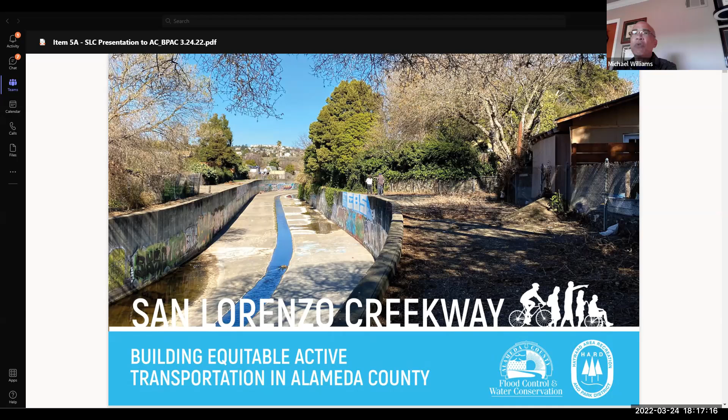Okay, you can move to the next slide, please.

So this is an overview of the San Lorenzo Creekway. There's a point in the past where it was called the San Lorenzo Creek Trail. We changed the name to Creekway because people, especially Caltrans and ATP funders, thought it was just a recreational trail, and so we weren't given serious consideration for the ATP program in our first application. So this will be the 3rd time we're applying, and we think the 3rd time will be the charm.

As an overview, if you're not familiar with it already, the San Lorenzo Creekway is basically taking the channelized portion of San Lorenzo Creek, from downtown Hayward at Lincoln Landing, right at Foothill, where it becomes the 20-foot deep, 20-foot wide or wider channel that runs all the way out to the water's edge, out to the Bay Trail. Once it gets closer to the water, it stops being a channel and becomes an engineered V section, but more natural.

Let's just say there's 5 or 6 miles of concrete channel. What most people don't know is the flood control district has a service road that varies in width, but at a minimum it's 12 feet wide, up to 16 feet, maybe 20 in some cases, that runs alongside the channel, sometimes on both sides, sometimes just on one side, but it runs the length of the channel. It's so they can get in there, do emergency operations, remove tree limbs and debris, and do other work that needs to occur a few times a year in the channel as emergencies occur.

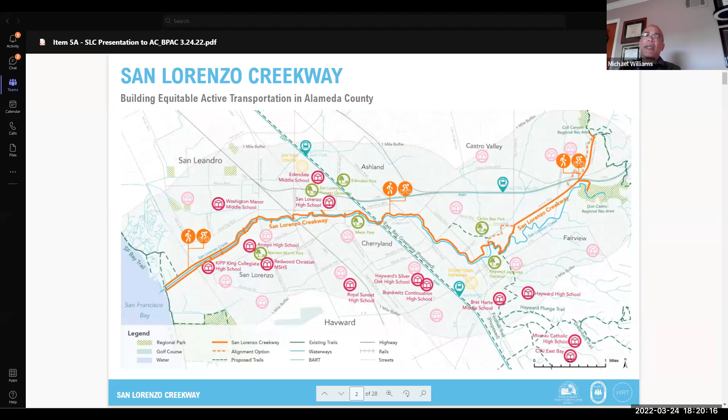So the plan is to open up that channel, to open up that road. It's somewhat paved already, but we'd repave it, put a finished paved surface on it, and open it up as a Class 1 pedestrian and bike facility for all users, all abilities, all programs, including safe routes to transit and safe routes to school. We would do that by putting at a minimum 2 things: a safety fence railing on the inside of the channel to prevent people from falling in accidentally, and privacy fencing, in addition to whatever exists, to protect the existing houses and homes along the creekway. So just fencing, railing, and opening it up as a ped and bike facility.

All in all, including from the Bay Trail into and beyond downtown Hayward, is about 7.5 miles. And we're doing it in one shot too - this is not build 1 mile or 1.5 miles this year, and then 2 years from now come back and do another section. The goal is to do all 7 miles as one project, one point in time.

So this layout here goes a little bit further to the east. There's actually a segment called the Upper San Lorenzo Creekway that starts at A Street, yes, right where Rick's cursor is.

That's actually a separate project that we are applying for under some other funding, not part of this main active transportation ATP program. But if we can get this active transportation funding and the Upper Creekway funding, eastern segment, we can literally connect the Bay Trail to the Ridge Trail through Don Castro Park and the East Bay Regional Park System.

We can connect East Bay Regional Parks. They have the Hayward Shoreline Park. We can connect them to their own parks in their own system, in addition to connecting parks that HARD has up and down the corridor. So that's basically the concept.

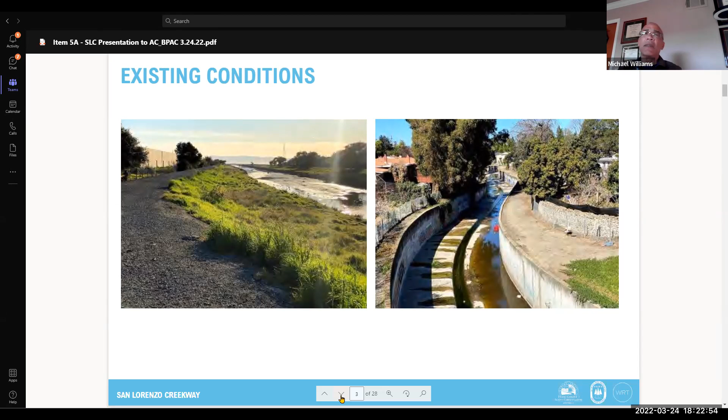On some level, I'd like to really add the BPAC to that list as well. If we get input, this is where the BPAC could serve - as individual members, or as one group - to certainly provide input at any point through this committee.

Okay, we can go on to the next slide. This is outreach that we did back in 2020 and continuing - we're doing some more now. The application is due in June. We're doing more outreach, but we're not going to redo all the outreach we did before, because we have that in a survey, encapsulated and documented in other data. But we're doing specific outreach, like to Reach - Ashland as a community center wasn't able to provide a lot of input and youth input, and Caltrans is looking for that.

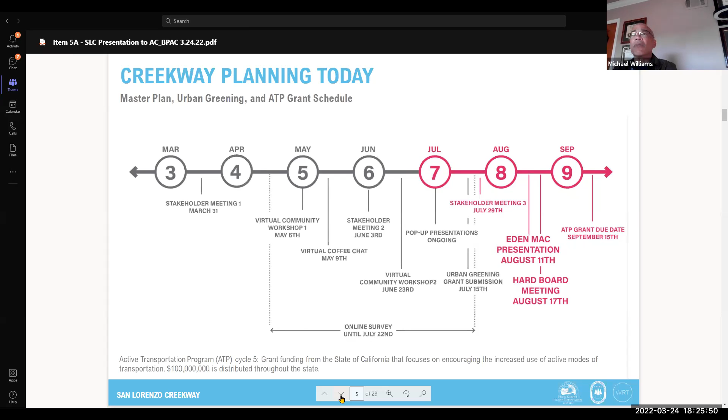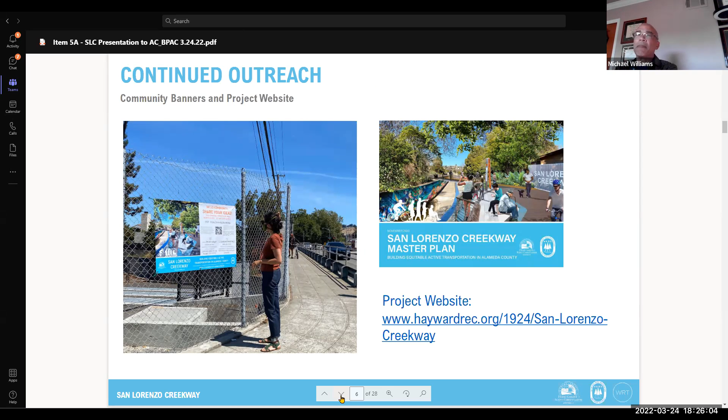The project website is on the HARD's website, and again, I can make that available. You probably don't want to copy it down now, but if you go to our website and put in San Lorenzo Creekway, look it up - it's there. We can go on to the next one, please.

All the questions really were about public safety, which we get and we're prepared to address. We're not backing down from public safety at all. And then there's 10% of people that don't want it no matter what—that's just 10% of people that feel that way about lots of things. There might be 10% of people that don't like pizza or something.

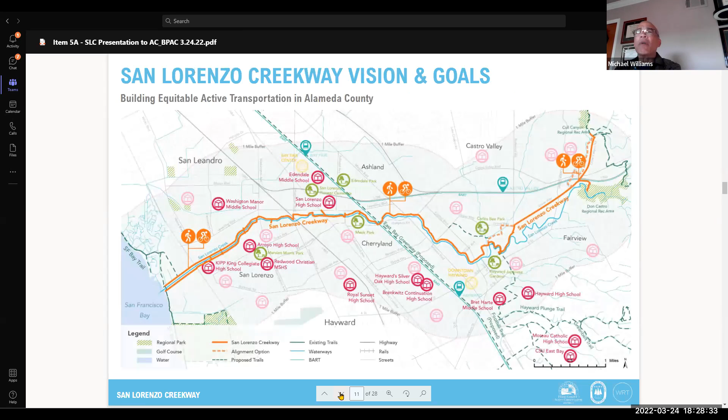Okay, thank you. That's more, we can skip to the next one. I hate to say stuff, but these are things we address.

There's tons of public benefit—to benefit communities in need. That's part of what Caltrans is. This money is set aside for communities of concern, disadvantaged communities that haven't had equitable access to parks, to transportation, to safe places to be outdoors. So that's what part of the active transportation monies, along with other grant funds, help do.

We want to increase walking and biking and make it safe. That's a very dangerous place. If people walk or bike on Lewelling or Mission—it's being fixed now, but there just aren't really good streets over there to walk or bike on safely, and most of you guys know that. So this helps address that by getting people off of dangerous streets where high injuries have occurred.

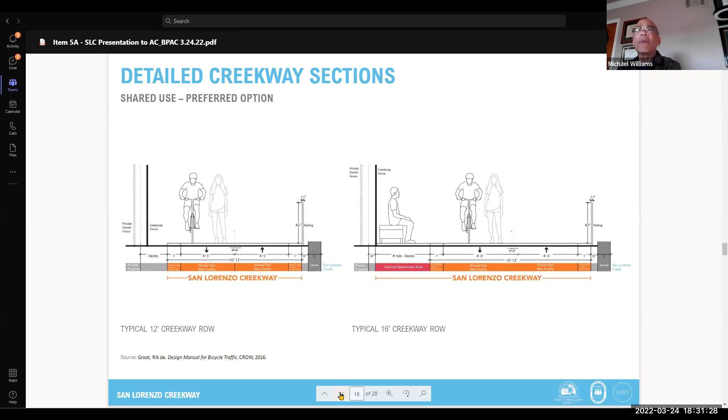This is a bad section to show because this is part of the creekway at A Street, but it was just an opportunity site, and this was one where we're planting opportunities.

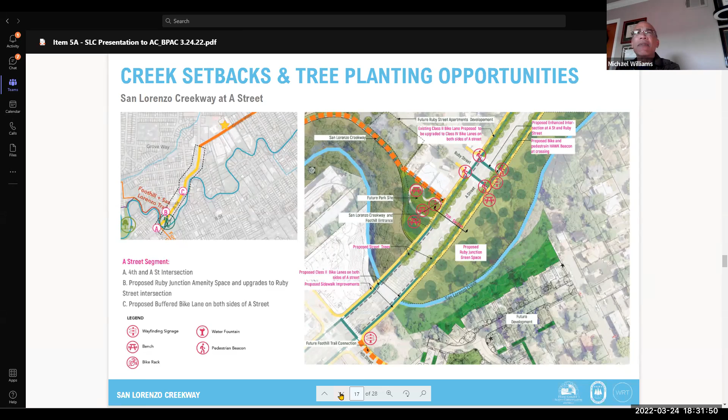Okay, we can go to the next one. Just connections, a list of things. Some of this is what we submit as part of our application, just saying what stores, libraries, and different things are nearby.

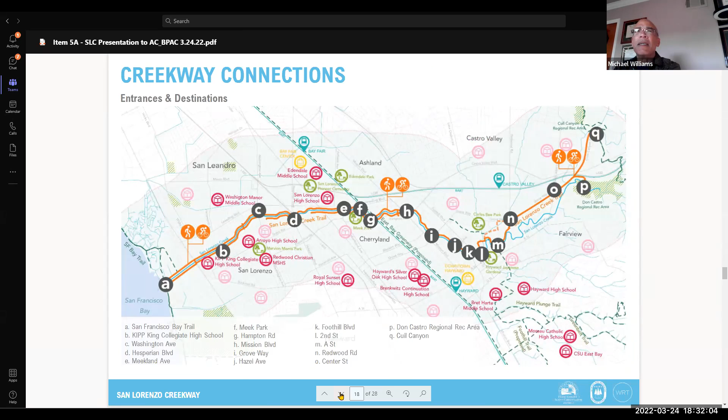Yeah, so this is where the BPAC can weigh in, looking at details where we have crossings and how we might do them. This is Washington Avenue proposed.

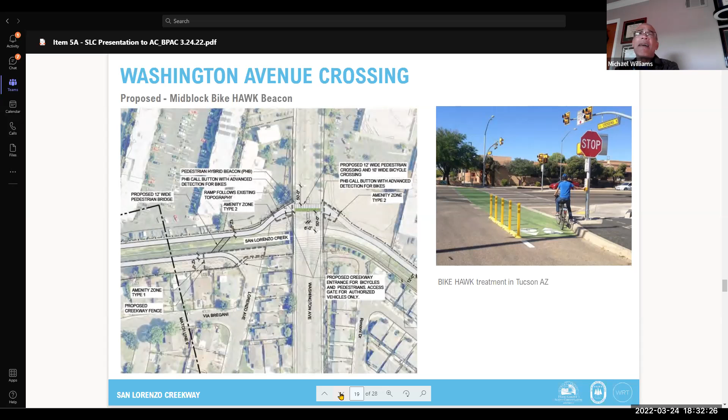You can go on to the next one because you guys all have this, so you can look at it in detail. If you have questions or other proposals or ideas, feel free to shoot me an email and we will look at those. We've studied this stuff pretty lengthily, in detail, but we're always open to having input, especially from the BPAC and people that are active users, riders, and participants in this area.

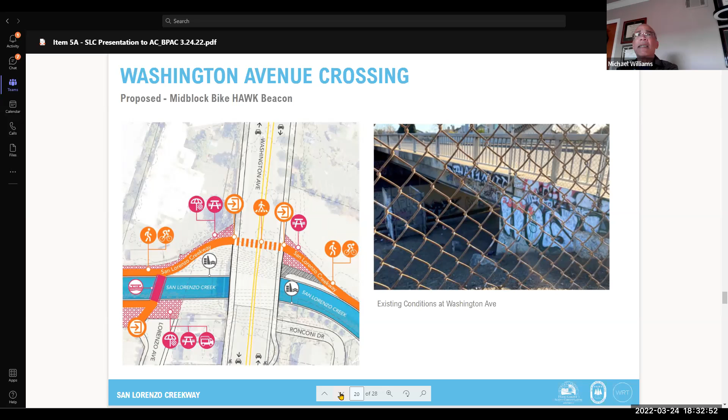Washington Avenue crossing. On to the next one.

Amenity zones. We'll keep going, please. It's just more of that, the same kind of view, telling you where we're looking to get railing, privacy fencing.

There's a couple of places we're going to have to put new bridges across to get from one side to the other, because the road is not continuous. So there's a few places where that occurs.

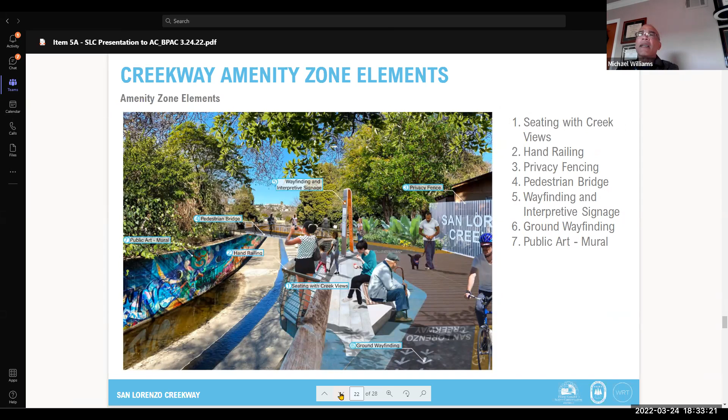And you can go on to the next one, please, Rick. I'm not looking at the time, so hopefully this is not taking too long or boring anyone to tears.

Strategy-wise, we're addressing trail development, maintenance and safety, education, ecological restoration, and social services needs. The partners are HARD, City of Hayward, Alameda County Flood Control District, school districts, social service providers, developers, HOAs, local community groups and advocacy groups.

So this is not just HARD's idea to go do something and shoehorn it into other people's lives. Next one, please. Or comments, sorry, we can skip through that. Okay, so...

This is important, and this is where I am soliciting input and comments. Again, if tonight's not the best time or location to do it, that's fine. Just email me afterwards, please, on this.

We had to make a couple of changes from the last two iterations, the last two applications, to this one. On this third one, one of the things we think we lost some points for in the previous iteration was that we kind of tried to keep it linear, saying hey, we're going east to west or west to east.

And there's nothing else in the area that does this. If you know the area, there is nothing else that runs east to west that can do what this does until you get down to Fremont on the Alameda Creek Trail. Even up in Oakland, I don't know where else, Oakland doesn't even have anything that goes east to west. I know there's the San Leandro Creek Trail, but it won't function in the same way, and it's not going to do quite the same thing the same way we will.

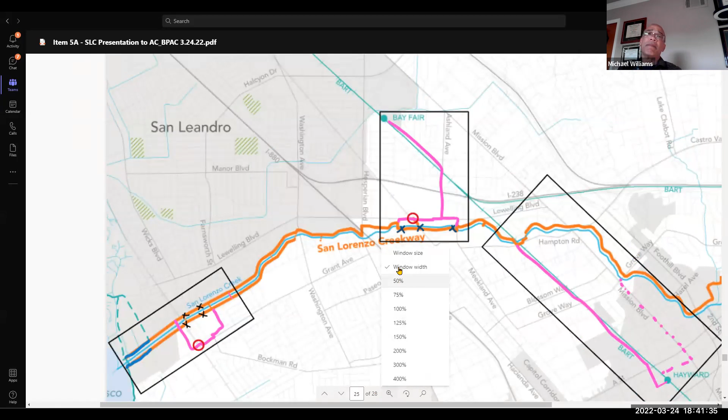That one down there. If you want to go to the next slide, Rick, we have some close-ups of these couple areas. So yeah, here's the KIPP King School. This is what I was just talking about.

The red line across the creek is a new bridge. So we will be on both sides at this location, but to continue east, we'd have to come along what we think is Railroad Avenue where the dotted line is. And then go east, and go in at KIPP King where there's another bridge already existing that we'd have to talk to the school about opening.

And if that falls apart, we can go up to the neighborhood, see where the dotted line is, Rick, out on Grant, and then just turn in there. I prefer to use the bridge at KIPP King—it's already there, and if we can work out access and public safety issues, we can address that. I think that's a better and cleaner way to go. Benefits the school too. So we will get to that.

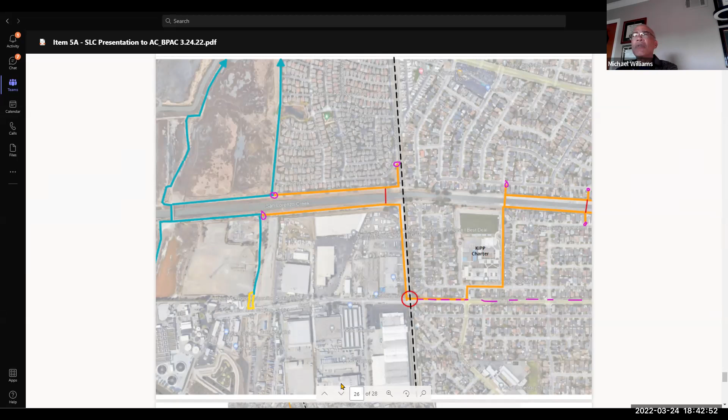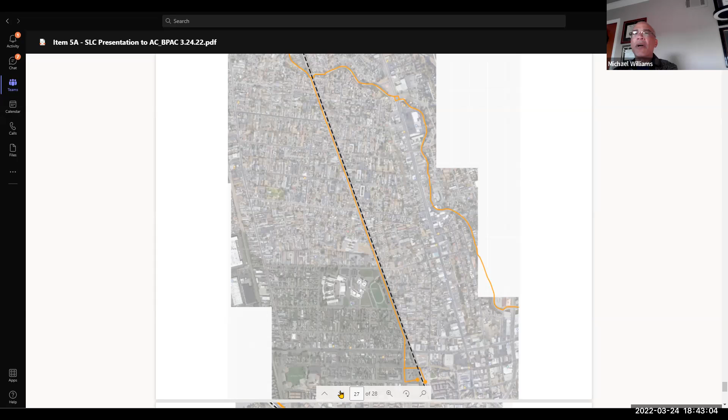You can scroll to the next. Yeah, I don't know what this—oh, that was just showing the street Western, going down to Hayward BART. And then I think the next one, yeah, that just shows more detail on Lewelling, and then coming off and going to Bayfair BART.

So I think I probably ran everybody out of the meeting. That's it. I'll give you my email address: WMSM, just William Mary Sam Mary at haywardrec.org. And you can just email me comments and questions, and I'll have our team look at it and get back to you.

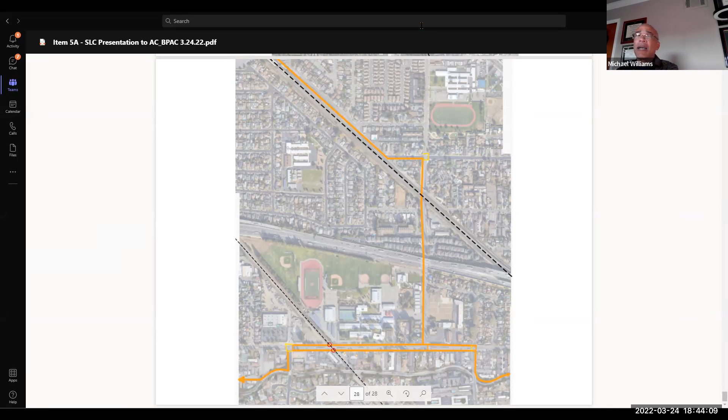Unless Rick wants to do it a different way. I know there are other presentations, and this is not normally where we sit and hash through things, but we are looking for input on this before we go back for the next round of funding. So I think that's it. I will answer other questions if someone has general questions, but I guess we're not going to get into details of, can we cross on this street versus another street?

Okay, well Michael, thank you very much. That's good to see all the different elements of this project here. Maybe go ahead and turn to the committee members. Looks like Dan, your hand is raised. Go ahead, Dan.

Yes, Michael, thank you very much. I had a question—I don't know if we can show, I think it's page 17. I had a comment and a couple questions. Let me see, hang on. Back there. The area—what was that page again? 17.

All right, so this area here—well, first I have a question, Michael. I see the orange line, it says San Lorenzo Creekway and Foothill Entrance, right there where we're kind of, yeah, where it hits A Street, is that right? And then the orange line is way down at the bottom—you can't see it the way the viewport's set up, but it's down there near the bridge, across the bridge on the bottom left.

Is that the beginning of the trail, or is that where people join with another trail? Are you looking in the inset there? Okay, you know where Ruby Street meets A Street? Yeah, right. And what's the significance of where the orange line ends? Yeah, that's the end of the San Lorenzo Creekway. This is the end, okay—the eastern terminus. It ends, dare I say it, at Ruby Meadows.

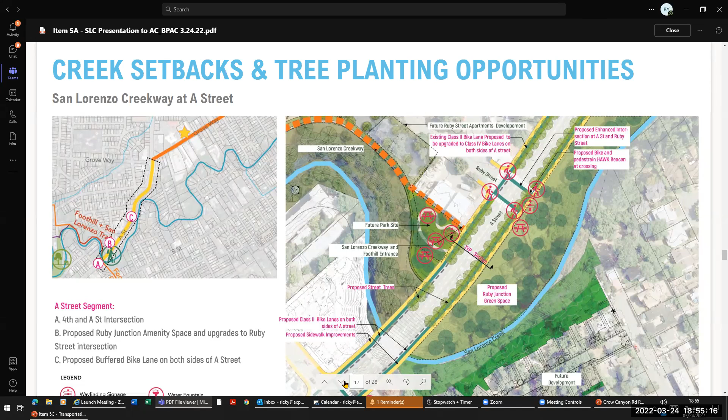On the detailed creekway sections - I don't know what page that is, but it's the page with the bicyclist - are we sharing the road as a pedestrian? Are we going to be sharing the road with the cyclist, or is there going to be a lane for the cyclist, how is that going to go? There's lanes, it's divided. Yeah, it is divided. Okay, that was my question.

Thank you. Is that your only question?

Benita? I think so. Okay. Yes, well, that was going to be my only question.

There are sometimes I just get tired of sharing the road with cyclists. They just drive by so fast, and you can't enjoy your walk with headphones on because you're afraid of getting hit by bicyclists.

I'm glad you're bringing that up, because I know you also represent the United Seniors of Oakland and Alameda County. We got a letter of support from them in the last round, and we're looking to get another letter of support from them. But we also want to get that kind of input and feedback, which is important.

You're not the only one with that concern, but it's a valid concern, especially since we're talking about safe routes to school. So it's something we do need to address. I'll take that in and make sure I communicate with you, and we'll probably present to USO at some point before we go back again.

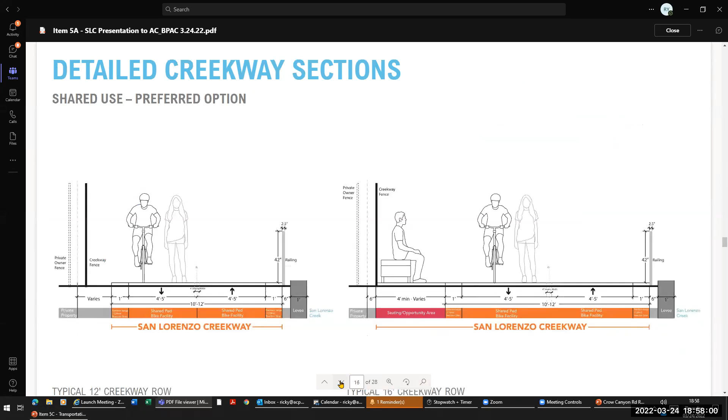Also, for places where you've got perpendicular crossings, it'd be great if we could coordinate on some bus stop locations possibly. I know there's been a lot of interest from East Bay Regional Parks about improving connections to parkland and recreation space, and I know the county's resources are limited for infrastructure improvements, like all of us.

So if there's any opportunity to collaborate, that'd be great. Definitely, let's talk offline. Is Catherine taking her place, or is she still working too?

Catherine is in a new position in our long range planning group, and we're getting a new backfill transportation planner who will be the point of contact going forward, in about 3 weeks. But I'll be around either way. So okay, well then we should definitely chat.

Let's connect, because honestly, last time we looked at some of the AC Transit involvement, it just didn't get that far. We tried to reach out, I forgot who the person was. I begged someone to get a letter of support and never got it. I don't want to put AC on the spot, but that was one of the few public agencies that didn't come through with a letter of support.

Not the end of the world, and sometimes letters of support matter, but I think meaningful engagement and dialogue is what we want to have with you, especially since East Bay Regional Park is one of our partners and we're working with them. So that's going to be important for us to follow up with you. If I don't reach out, just send me something and I'll follow up. For sure, super appreciate it.

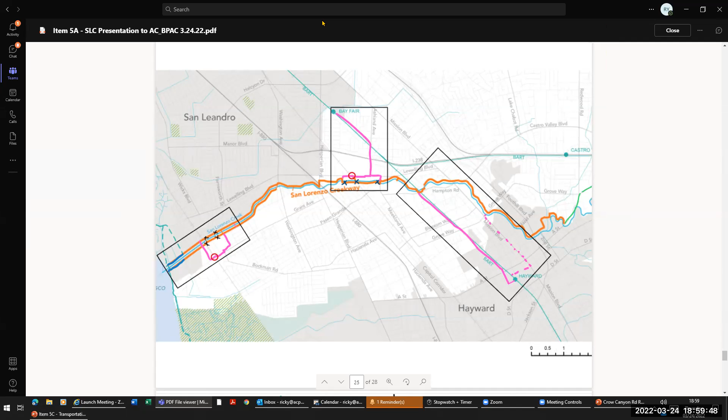I think that's all we have from the committee. Let me open this up to the public. Actually, I did have one more comment. Maybe this is one of those things I meant to mention about support from the BPAC. This could be one of those things we could vote on, right? Like Michael had mentioned.

This is an informational item. Correct, that's the way it was agendized, but it could have been agendized differently, and in the future it could also be agendized as an action item. I'm just bringing that up because it's a really great idea.

All right, let me go ahead and go to the public. Let me see here. Hello. Tyler, go ahead. Hi, how's it going?

I just want to say thank you to Public Works. This is so needed, and it's great to hear that someone knows how dangerous Lewelling and Hesperian down by Four Corners is for pedestrians or bicyclists. Sad to hear about the railroad connection.

I live really close, just a street over from the San Lorenzo Creekway, and I want to voice my support. I was wondering if in the documents, as far as proposals, you could mention how this would enhance the East Bay Greenway, because the East Bay Greenway really does connect BART so well.

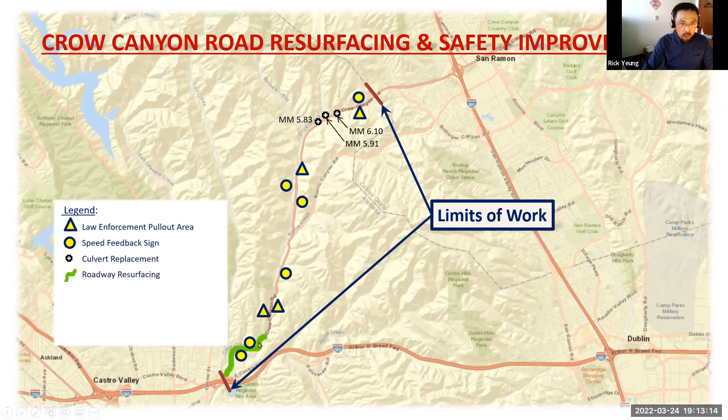A few places up in the mile marker 5, mile marker 6 area, we're going to be doing some culvert replacement. Down in this lower portion between Castro Valley Boulevard and Coldwater Drive, we're going to be doing some resurfacing work, and a little bit of guardrail upgrade right in this area.

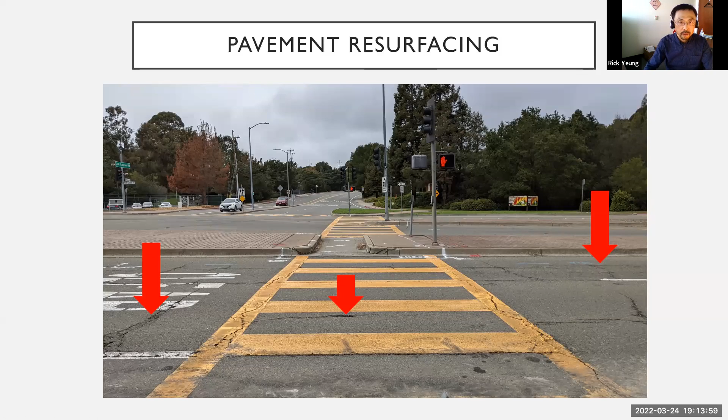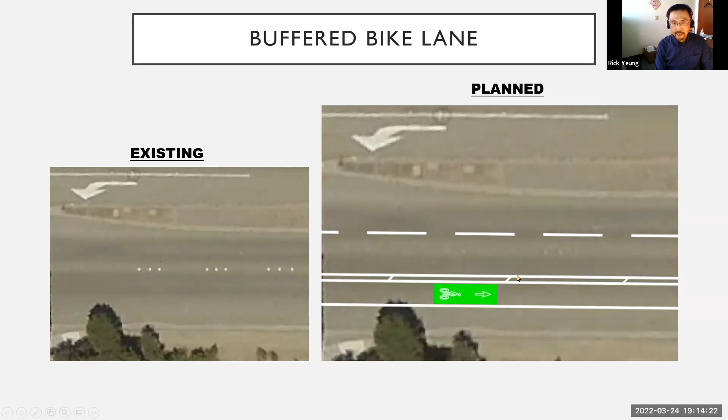And of course, when we repave the road, we have an opportunity to repurpose some of the area for other use. So for example, in this case, this is the existing condition. We basically have two traffic lanes. We're going to reduce the width of that traffic lane and put in a buffer bicycle lane. We're also taking this opportunity to upgrade the pedestrian ramp to meet ADA standard.

Mentioned about the speed feedback signs, we'll be installing a number of these throughout Crow Canyon to help reduce vehicular speed and provide traffic calming.

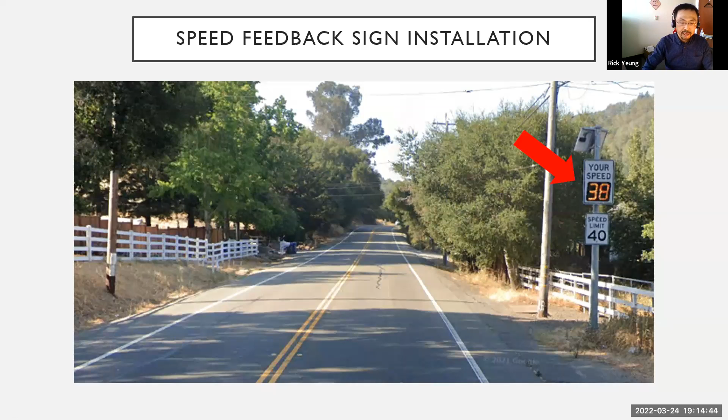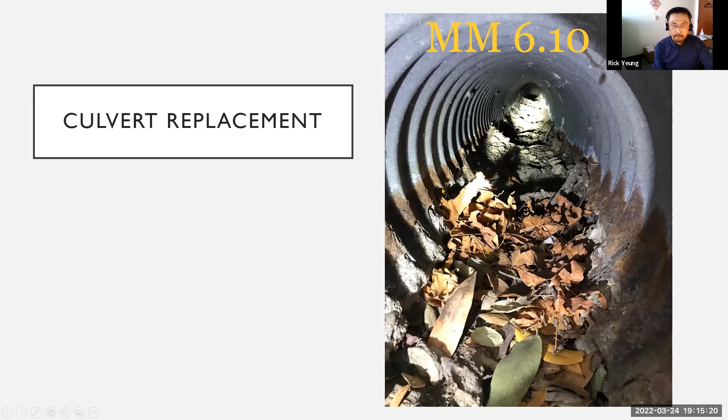In addition to doing work above ground, as you can see in this video inspection picture, some of the culvert also needs to be replaced. So like I showed in the general map, there are, I think, three locations where we'll be replacing this culvert.

Quick schedule outlook: upcoming in the next few months, we're going to be finishing up the paving work, doing striping work, installing signs, finishing up the speed feedback signs, working on the guardrail, and finishing up the culvert work. Overall, this project should be completed summer 2022.

And that's it from my presentation. Let me stop sharing, and I'll take questions from the committee. Let's see, Bruce, go ahead.

I just want the rest of the committee to understand that one of our roles is to enact the bicycle ped plan. And the bike plan does call for class 4 bike lanes along here, and there are a number of ways to do that.

Protected parking would be one way, removing parking, which is very underutilized, is another way. I think what the actual bike plan called for from the consultants was the possible road diet. But anyway, this is an opportunity to actually implement the bike plan, because once this is paved, you guys aren't going to touch it for another 20 years. And that means we have to wait another 20 years to get this protected bike lane.